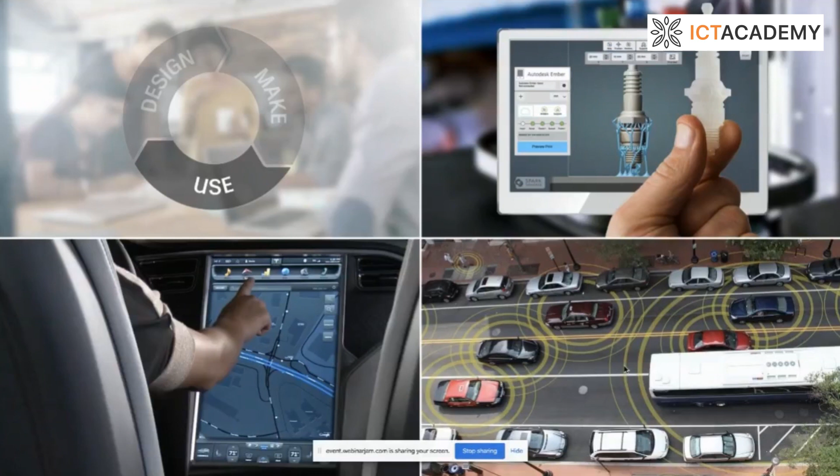Now, when it comes to the phase of use, there is a deeper integration, a greater connection happening between the digital and the physical. What this really means is sensors are playing a bigger role, and the data that comes from products is becoming very important for designers as well as makers, so they can bring a better quality product to the market.

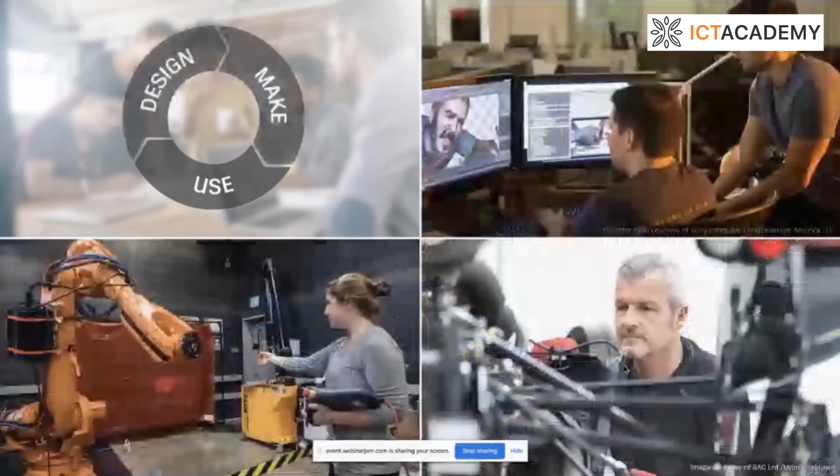Even under the digital environment, what we used to do when designing our products was virtually see it on our computers. Now 3D printing is coming into picture, where I can really touch and feel and see how exactly my product looks from all directions, and get the feeling that yes, this product is exactly the way I designed it. So there is a new generation of people using designing and making in a different way and getting different kinds of products. Again, the design, innovation or make is not just restricted to bigger industries - anybody with an idea can easily get their product to market much faster.

Let us pause a little bit and go back to the history of how the transformation of eras happened. The first era we saw was the era of documentation, where Autodesk was disruptive, moving its customers from a pencil and paper to a 2D drawing on a digital environment. I'm talking about the flagship product of Autodesk, AutoCAD, which is a norm of every industry - small, big, medium, educational, everywhere. AutoCAD became a very common product used across industries. That is the change we saw in the era of documentation.

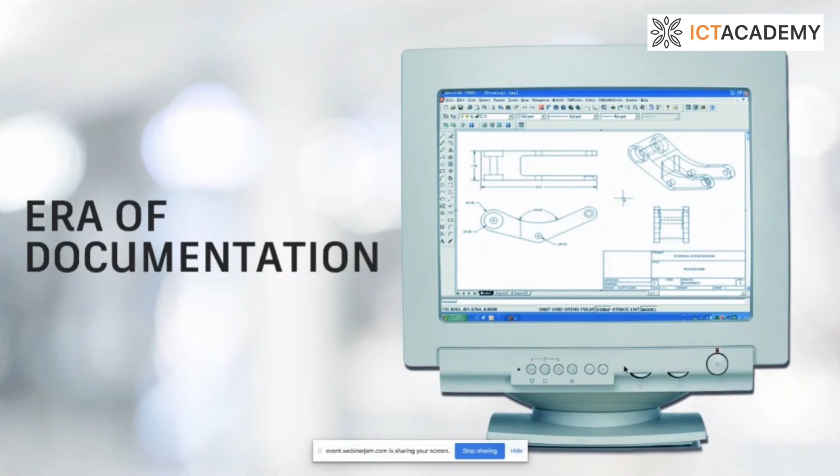Now, everything was good - it was on 2D paper. The geometries, the text, the dimension information, everything was accurate and precise. But what really was challenging was how can I make a decision, or how can I really visualize my product? That was a big challenge.

So everything, that decision was either by intuition or by judgment. That's still a lack in the times of the era of documentation.

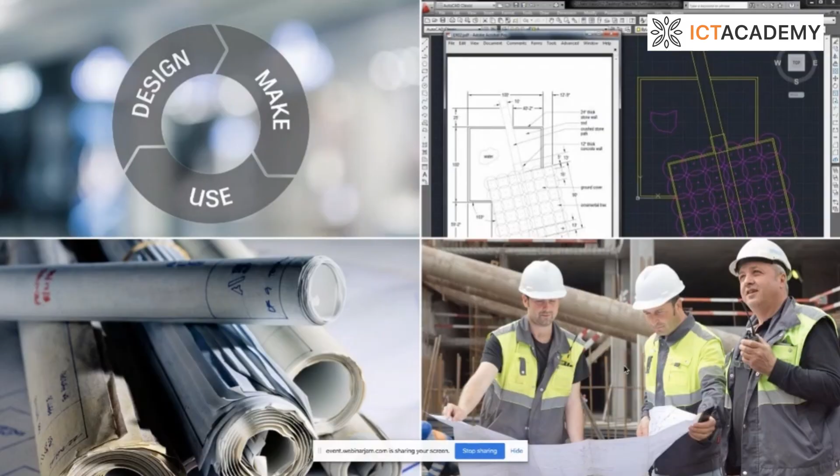Then we moved from the era of documentation to the era of optimization, where optimization played an important role, where we moved from a 2D environment to a 3D environment, where digitally we were able to actually see how the product looks from all the different angles.

Not only that, we were able to simulate appropriately, we were able to do the analysis on our component products or the design before it was actually built. So a huge reduction in the prototyping environment, right?

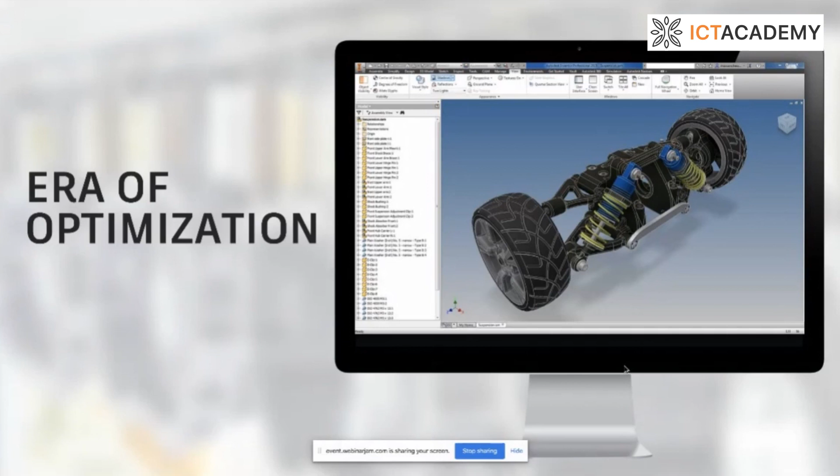We had a very good predictive information with respect to the 3D design models. 3D design definitely gave us a lot of predictive information, profound insights about the design, as well as precision and accuracy. It gave us information and understanding of how things go together, how things interact together. That's how the design in the era of optimization took place.

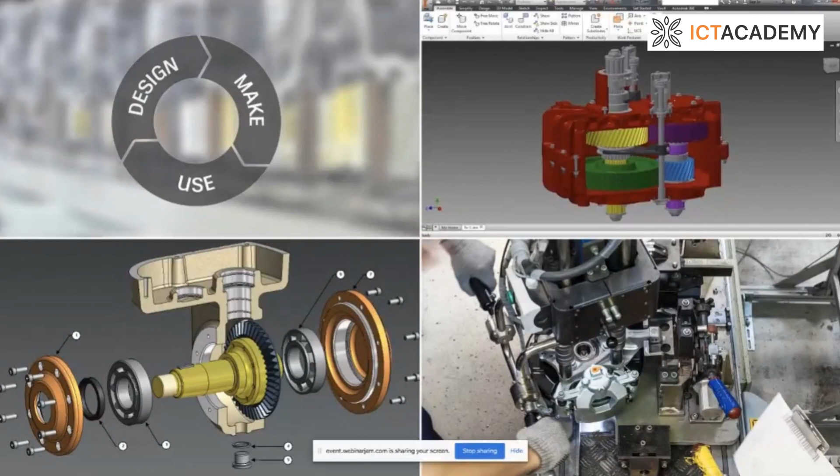And now we are in the era of connection. So what this really means is that we are going beyond optimization. We have to optimize how the product is built, which interacts with other systems, which works with other systems. So that is the change that we are seeing today.

Very much the example of how I mentioned the era of connection, the physical and the digital are getting closer and closer. People on the construction site are able to use the digital environment. They are using drones to see validations, to see the construction site and gather information that are more relevant to build better products, more relevant for them to think how the future of making can change in terms of design and make.

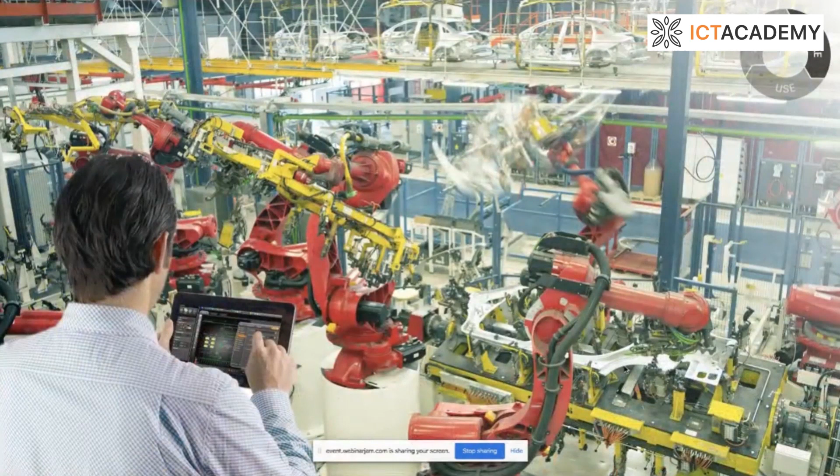It's not just restricted to one industry. Even the advanced manufacturing industries are not lagging behind. There are robots being used, automation being increased, 3D printing being increased. Robots and drones are being used to man the factories as well. So all these devices are becoming a common factor in terms of how the future of making things is being changed.

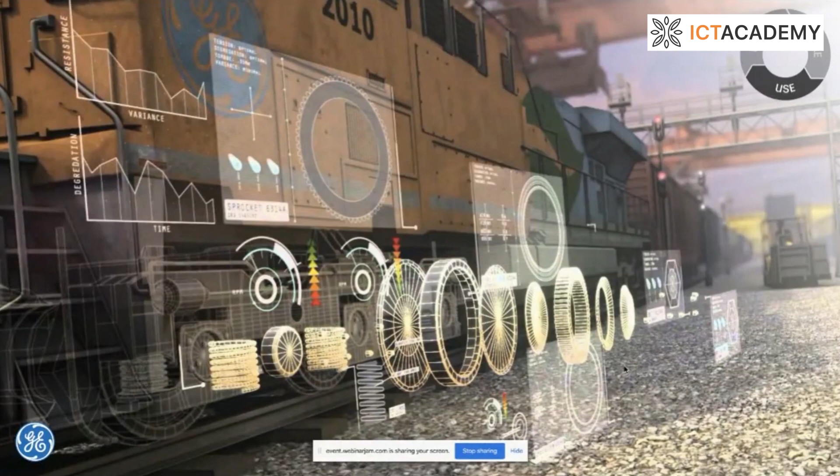If I have to explain this GE example, GE has built an intelligent, secure system where it collects data and feeds it back to the rail engineers, who can work on the design and utilize that data to make a better intuition, or a better design, or a better assumption of what's happening in terms of design and make, so as to get a better product to the market, and a predictive system as well.

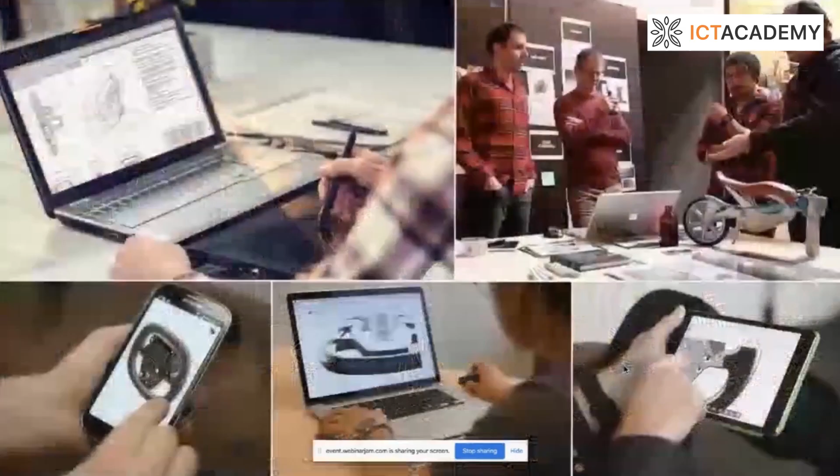As I said, the era of connection is so different that data can be accessed through any means, through any device, and anywhere from any platform. So that's the change in the era of connection. We cannot now work in silos or be aversive. The data is available. You can interact with multiple people across the globe and get your things done.

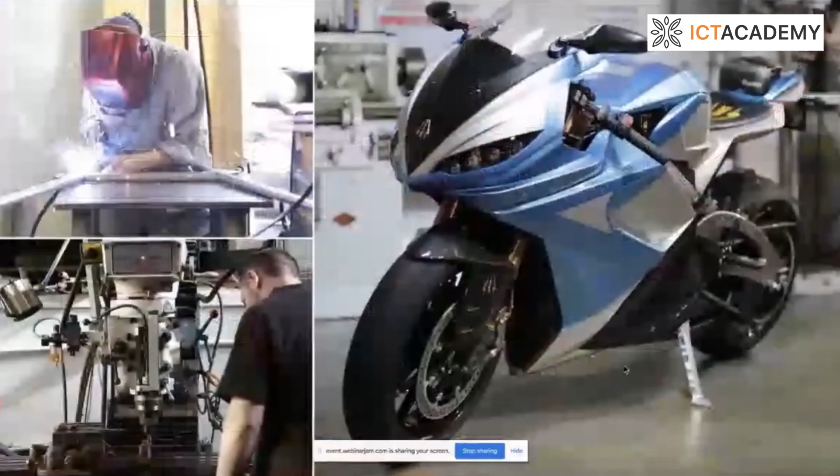Here is a beautiful example I would like to highlight in terms of make. We have this Lightning motorcycle company where Richard Hatfield is the owner. He has 6 people working in the garage, and he always dreamt about motorcycles and motorcycle designing. One of the things he really wanted to do was build an electric motorcycle, which he wanted to build in comparison to combustion motorcycles.

He wanted to really compete his product with respect to the combustion motorcycles that are currently available in the market. So what he really did, how did he make a difference? How was he able to successfully get his product into the market? He adopted the latest technology.

One of the technologies that Autodesk talks about is generative design. He implemented generative design in his design process, in his make process, where he manufactured lighter, much stronger products, and was able to successfully build this vehicle and bring it into the market. So people are thinking differently and adopting new technology to bring different kinds of products into the market.

Now, let us talk about an industry where weight carries a major role. Yes, I'm talking about the automotive industry. What you are seeing currently on my screen is the assembly line of General Motors.

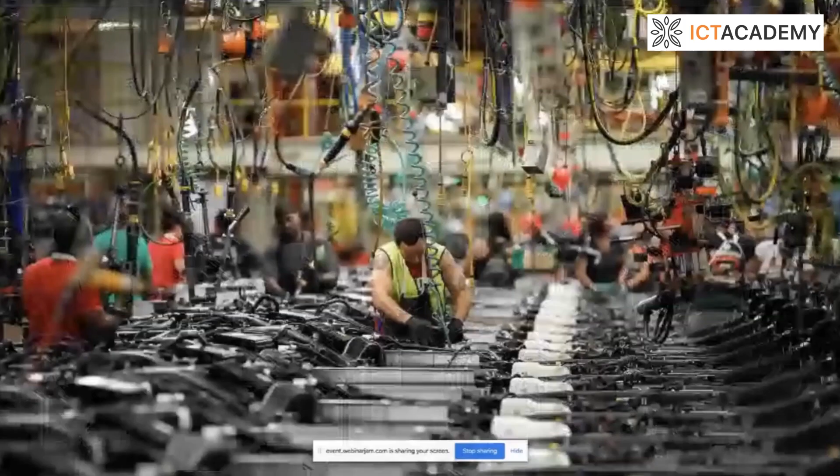General Motors always adopted newer technologies and automation in its assembly line to bring different kinds of products and improvements. It automated to an extent where today, every minute a car rolls out of the assembly line. You can see how they achieve this with the adoption of technology.

And it is not just that. If you imagine that there are 30,000 plus parts that go into a car manufacturing, you can imagine what kind of assembly line or technology they are adopting.

Assembly line optimization is not the only way GM was thinking, because as the automotive industry is changing globally, GM has to adapt to those changes and think differently. Since most car manufacturers are moving towards electric cars, GM also felt it had to rethink how it can bring different cars and work towards electric cars to bring them into the market. It is committed to bringing nearly 20 different electric cars into the market.

To build an electric car, there come along some challenges. The challenge could be the weight of the battery and mileage, the safety and lighter weight of the vehicle, or consumer response and affordability. So all these factors come into picture.

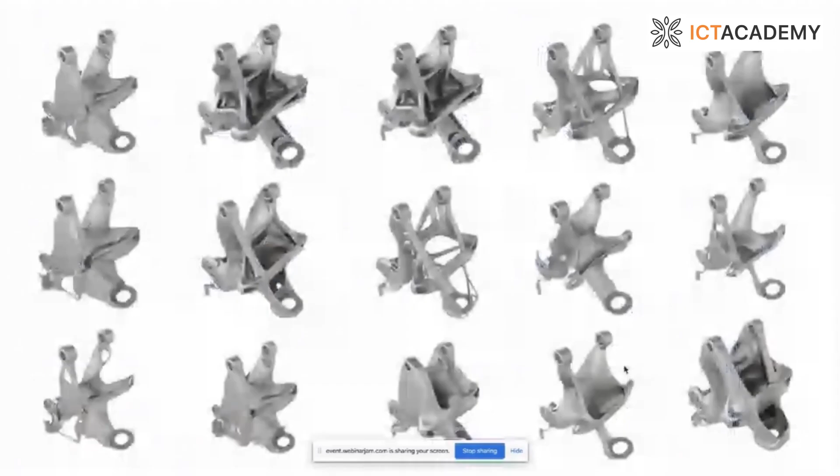So GM wanted to try this experiment in its case, and it came up with this product. What you see on my screen are different variations, different iterations of the design that they looked at. You will understand what this product is when I show my final slide in comparison to this example. These were the different iterations GM got from its design, and the GM designers were able to validate and analyze which design would be more suitable to them.

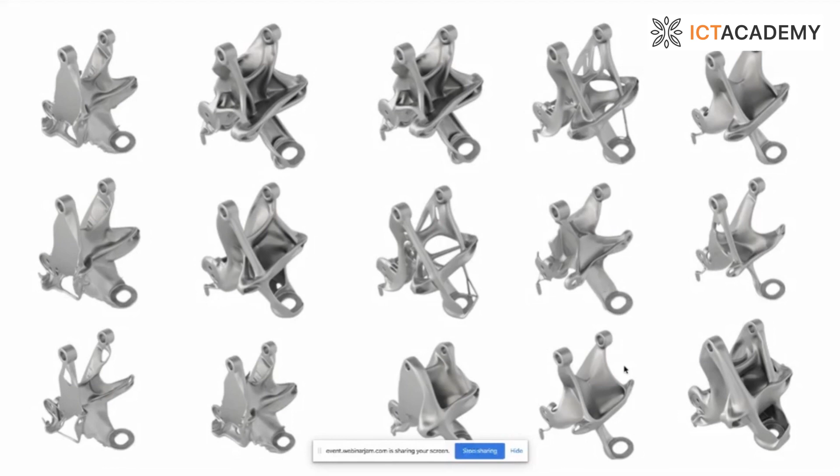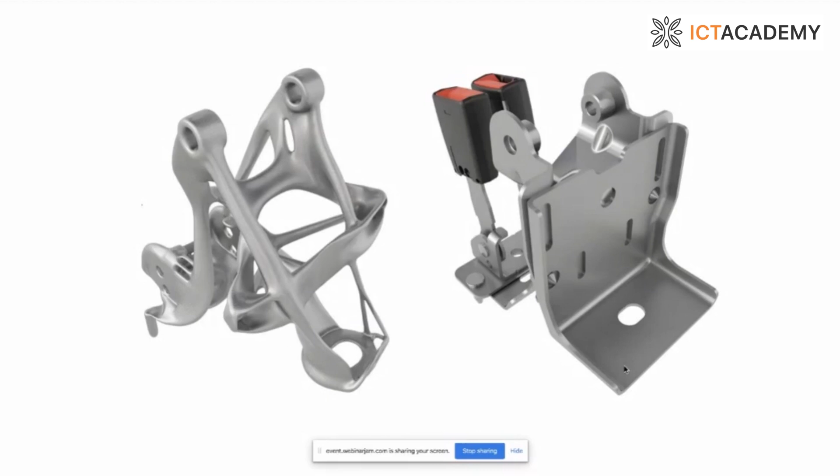Now, what does that really mean is, can you imagine how much GM could save in terms of material, in terms of its vendors, in terms of its cost estimation or cost model. So that is what GM felt, yes, this is the change.

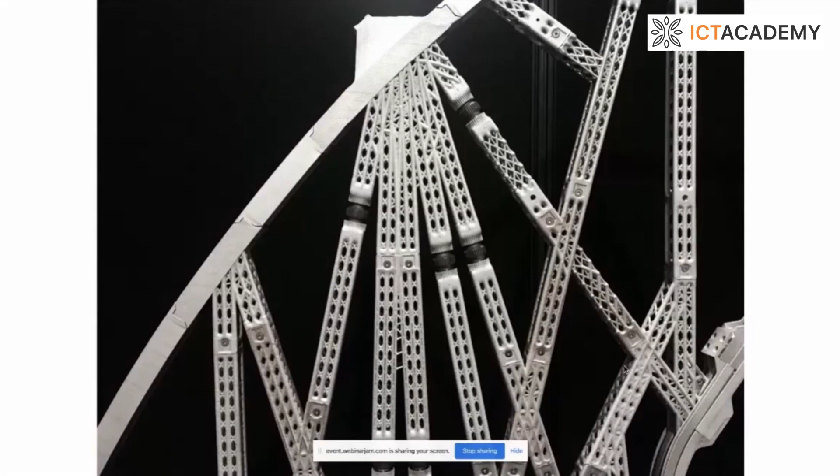And they finalized upon this product. So now let's look at another example. This is an Airbus example, again using a generative design case study. Airbus built a bionic partition. You will understand how the design, how the technology is playing its role. Now, what I am restricted to not show is the demos because of certain restrictions. You can understand all this as an output I'm showing as a PPT for you all.

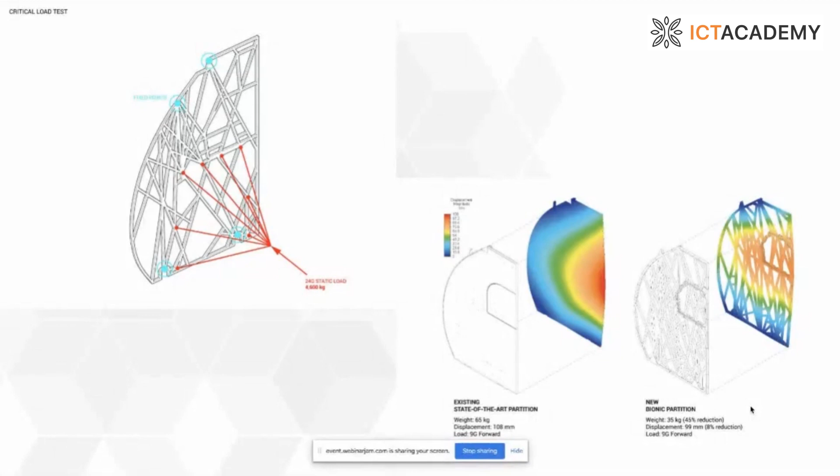Now, here are the different iterations. You may say, sorry, what difference would that make? You may say, okay, that's a solid partition, I go up to overhead. One is the reduction in the weight, meaning that there is lesser material being used in the product.

Second thing, what Airbus was able to achieve is Airbus was able to reduce 465,000 metric tons of carbon dioxide over a year, which is equivalent to 96,000 cars being off the road. That is the biggest achievement that they did.

And not only that, one of the things is basically how the aero industry works is based on fuel consumption. So the larger the weight, the larger the usage of fuel. So with the reduction of the weight, there's a reduction of the fuel. That's a huge savings for them. They can save hundreds of thousands.

So these examples, even GM, imagine I mentioned GM applying generative design for one component. Now I said there are around 30,000 parts going into a car. Imagine if GM starts applying generative design, what could be the change in the design? That's where the technology is moving towards. That's where things are being made so differently in the world. So we as educators, we are trying to bring students awareness about these technologies, help them use these technologies and try an innovative approach towards their design thinking.

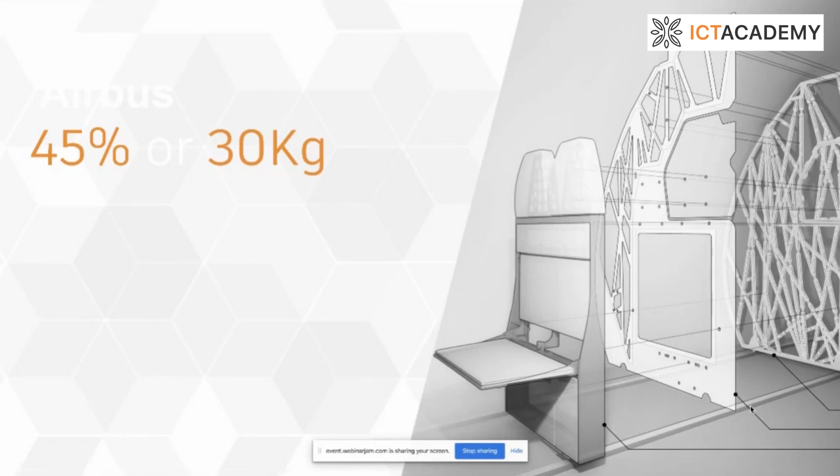If I take a material like ABS plastics, its weight is around 424 grams. Now, when they applied generative design terminologies, which you will explore at the end of the sessions, we will also give you certain links for courses where you can practice those things.

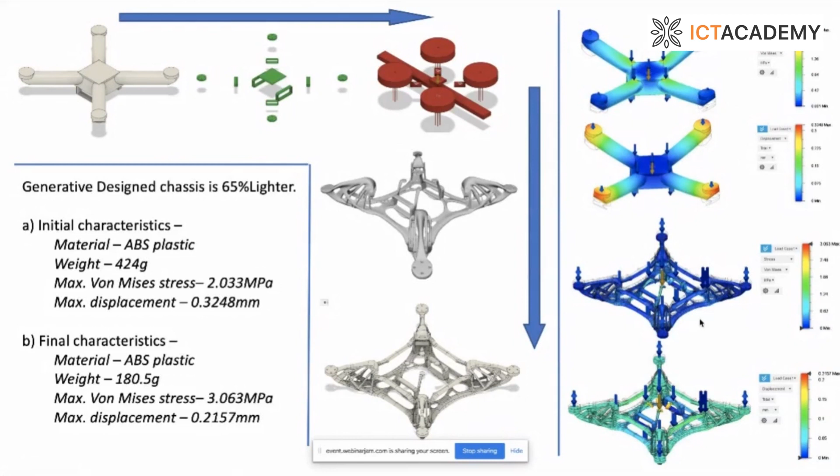This is a flying drone, which was also showcased at Autodesk University. I'm not sure how many of you have attended Autodesk University - that's the annual event from Autodesk where students get to showcase their products in this forum.

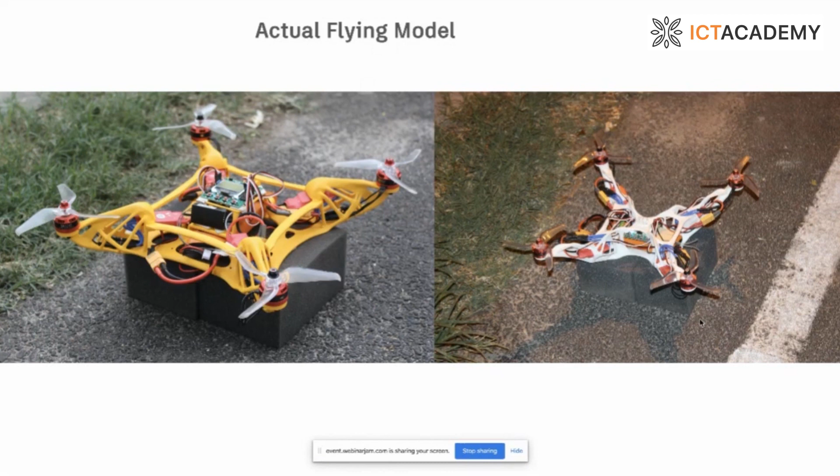Let's take another example from the same college. What you see on the left side is the design from an electronics student. I intentionally took this example because electronic students aren't usually exposed to the design aspect. This is what he was able to think from his design perspective, and he's won multiple competitions, first and second prize, using this same design with different variations. Can you look at this design? And what we, as mechanical engineers, did was collaborate with the electronic student and came up with a totally different design.

What you see on the right side is a digital design - one is the rendered output, and one is where Fusion 360 is being used, with generative design applied to create this product. So that's the transformation that happened.

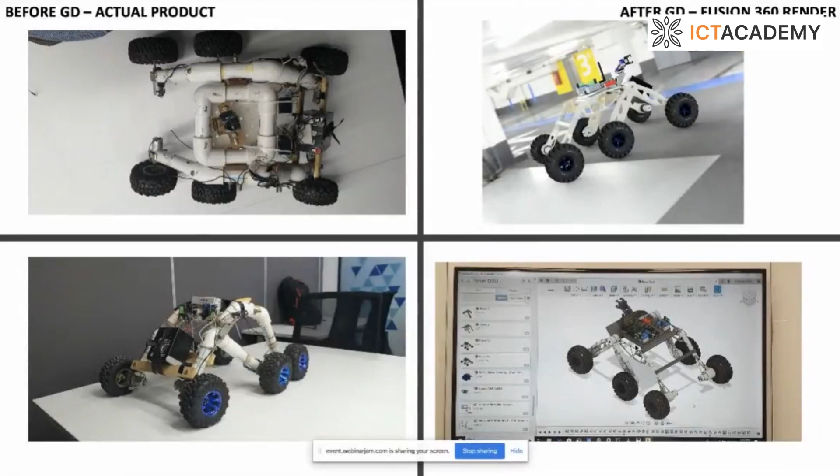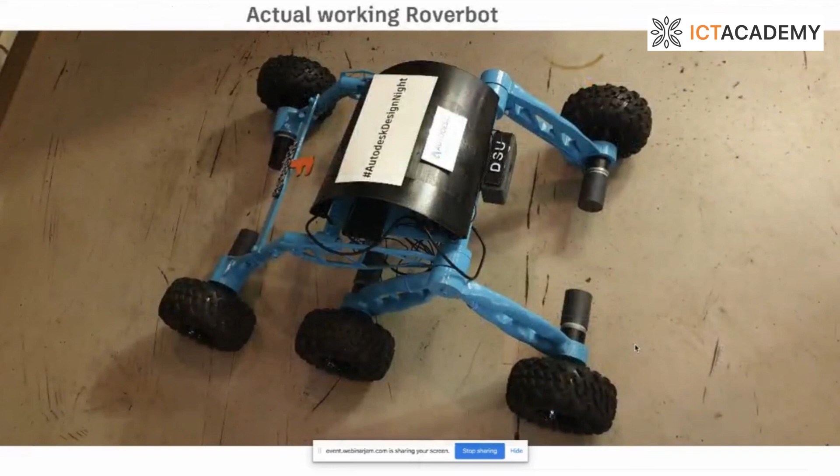It's not just restricted to design - make and use isn't one person's job for any product that comes into the market, it's not just restricted to mechanical. Every department or discipline can play its role, be it computer science, electrical, or electronics. Everybody has a role to play in getting a final product into the market. What you see is the actual product, a fully functional, actual working robot with the functionalities the student envisioned.

We also have another example from the student community. IIT Madras has collaborated with industry as well. What we saw earlier was a student project, but collaboration between industry and academia isn't lagging behind either. IIT Madras collaborated with Fiat Chrysler Automobiles and worked on an LCA, lower control arm, using the concept of generative design, achieving a 26% reduction in mass.

What you see on the left side in yellow is the current design, and the transition to the green model is the new concept using additive manufacturing. You can clearly differentiate how the model looked initially versus how it's changed - much lighter and much stronger, as I mentioned, in terms of percentage. So what I mean is, I'm not just talking about 3D designing or 3D modeling, I'm talking about the technology that people are trying to adopt and experiment with. That's what we have to look at.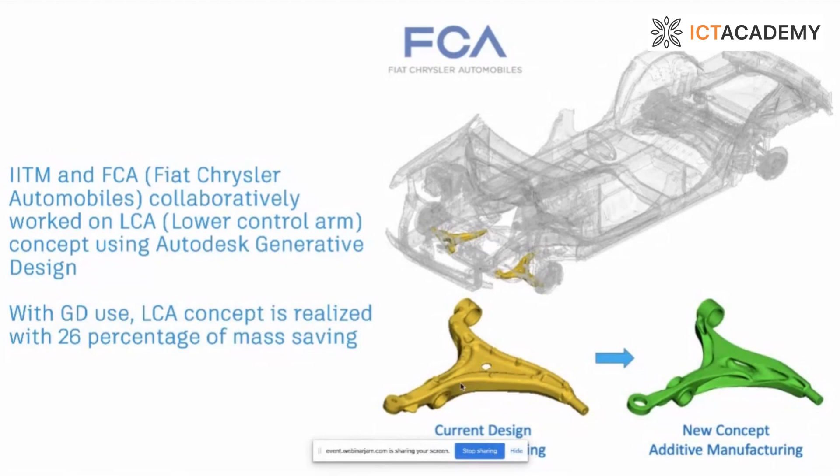That's what differentiated all these companies - to be different, to bring their products to market in a different way. So as designers, as product owners, we have to think differently. We have to adopt the latest technology. We have to help our students understand the latest technologies coming into the market, make them aware, so they're ready for the challenges the industry throws at them.

So what this really concludes is that as designers, as product owners, we have to build more and more products to meet the needs of our customers. But how are we going to do that? We have to do it with a lesser negative impact on our planet, and build better products, better designs to meet customer needs. So we aim for more from the customer's needs, with less materials and resources, and a better product output.

So many companies do come to us asking, hey, how can we be a part of this changing world of the future of making? How can we participate in this world where the future of making is completely changing?

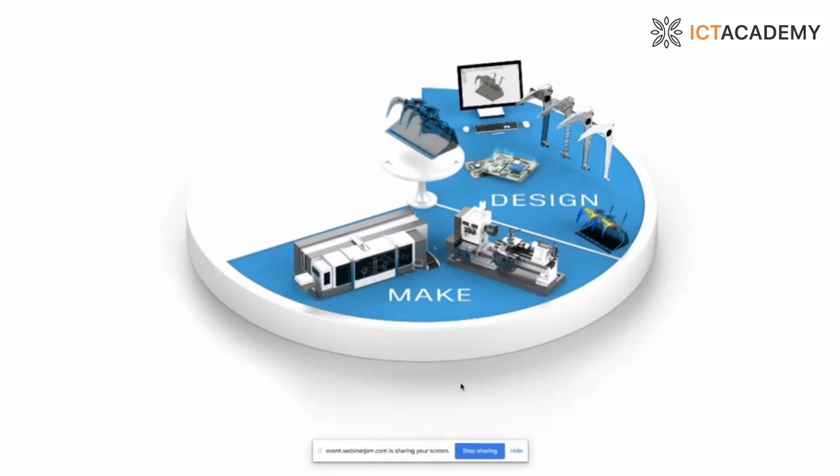We just didn't stop there. As I said, it's not just about the design. We have to also think about the make as well. So there is a deeper integration from design to make. CAM, the major requirement for the make, is either additive manufacturing or the CAM part of it, and CAM is an integrated part of the Fusion 360 product. So you can very easily transition from your design environment to a make environment and get the actual physical product to be viewed and visualized.

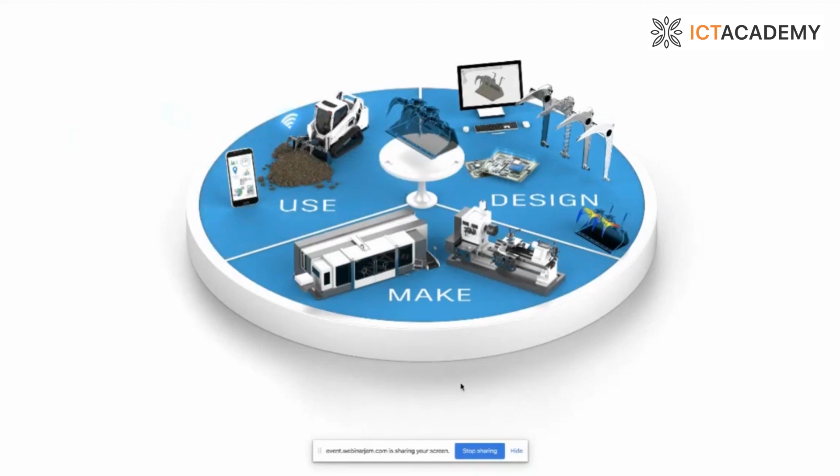Not just that — how the product that we have designed is functioning in the field, that data is also being captured and fed back to the designers and makers, so there is an improvement, a predictive maintenance you could say, or an optimization in their design or performance optimization. So all that can be very well maintained or captured.

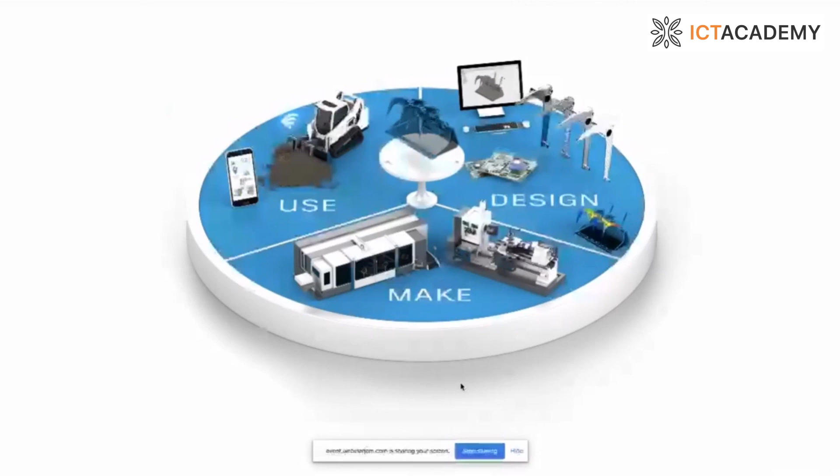Nowadays, so many factories are putting sensors across many components, be it motors or any kind of equipment, so that data is regularly fed back to the designers or maintenance unit, so when they see there's a chance of a breakdown well in advance, that component is replaced in the complete unit. Otherwise, because of one simple product, the whole production unit or factory may be shut down, which would be a big loss.

So that is the way things are being changed, that is the way things are being made. That is what I was talking about — we have to look towards the future of making differently.

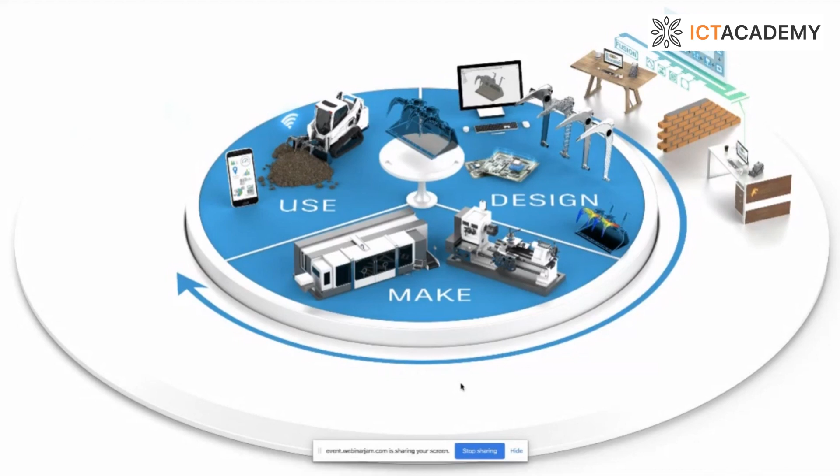We're not just restricting to one product. Autodesk has a large product portfolio. The reason I'm saying this is you'll come to know in my future slides why I intend to mention these product portfolios, which you could very well use at your level, and we could help your students use at their level too. You can even optimize using a product called NetFabb. And if you want to do advanced level manufacturing, we have products like PowerMill which will help with that. And with Fusion Connect, you can even see how your products are working in the field or environment, how they are being used, and get that data and build on it.

So as we at Autodesk feel how the world is changing, we also changed our product portfolio. We're not just selling one piece of software or helping students work through one piece of software. What we say is, if I have to meet the needs of today's change in the future of making, then I definitely have to be a product innovation platform. That is what we intend to bring into this generation.

So the whole story lies around design, make, and use, but that is one part of it. The real power we have to think about is how can I remake? That is the whole idea about the product innovation platform. Imagine if the car can give so much information back to the designers or makers, then different kinds of models could come into play, and we can use the same resources, because ours are exhaustible resources. So it's not only about design, make, and use, but every industry has to focus on the remake part as well.

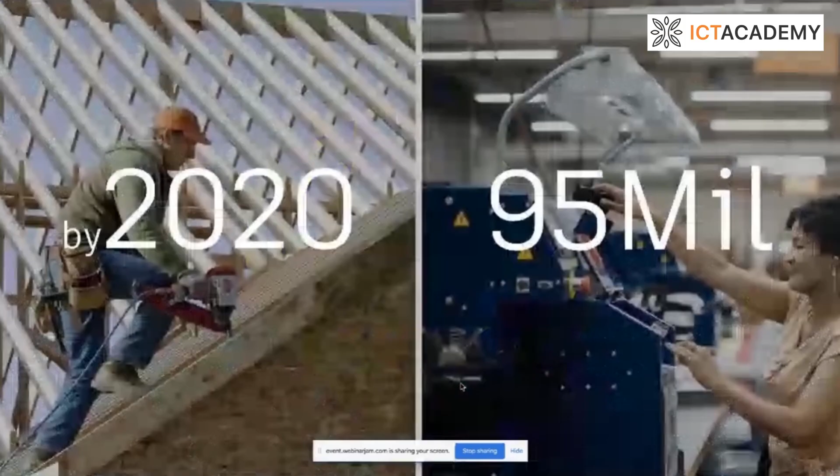So that was more about the technology aspect point of view. As I said, I'm not able to show them live, but I hope the information fed captured the design aspect and the technology aspect in terms of PPTs, trying to help you understand how the transition is happening. Maybe Anbu sir, if you want to put some polls here, because now I'm going to go with slides that are a little non-technical, where I want to give a picture about how Autodesk is playing its role in education and how industry is looking for certain skill sets in the market.

Okay, I'll quickly put one question, a very simple one. I'll just start the poll. The question is: do you know Autodesk products are free for education, and there is no difference between the education and commercial version? I've just published that question. I'd request all of you to answer: do you know if the Autodesk products are free for education and there is no difference in the education and commercial version?

There was one question in the chat window asking, sir, why are you using Autodesk? Why not other companies' products? See, we at ICT Academy, being non-for-profit, second, we are supporting academia, and Autodesk is the one and only organization which made very expensive software products free for education. End of the day, we are teaching design, we are keen on teaching people design. So we thought it is good to teach design in a very popular product, and of course in our context it's free for education. So that's what made us initially decide we will be with Autodesk and go with all Autodesk products.

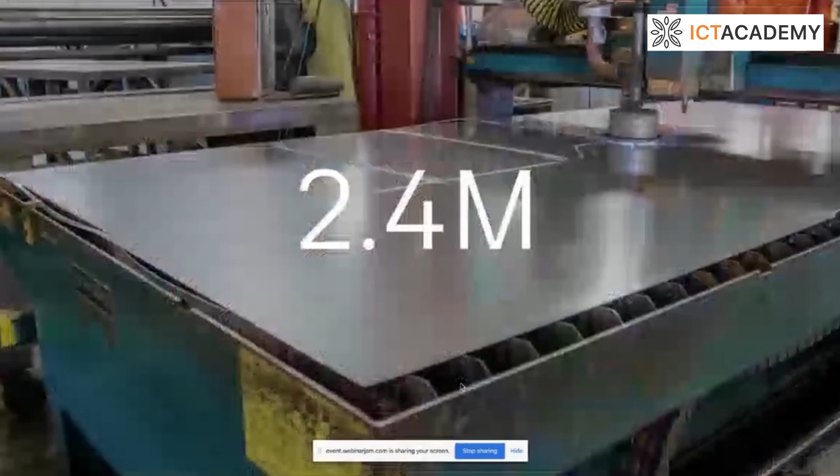And if I have to tell you, especially just in the US itself, there will be 2.4 million job openings between 2019 to 2028. That means 53 openings out of 100 will be available just in the US. And imagine the global requirement that is going to be there.

One of the biggest challenges the industry or our customers in this domain are facing is the retiring of the aged workforce and the advanced technologies, the advanced equipment to handle. Also, because of this lack of workforce, the products coming into the market are delayed. Not only that, industry is not able to find the right talent or the credentials required by these customers.

But we also have very good news. We have a generation globally predicted to be 2.52 billion, and this generation is anybody born after 1995. This generation is very technologically savvy, very curious about learning, and very active in adopting whatever changes come to them. So that is good news for us to help this generation meet the requirements of the industry.